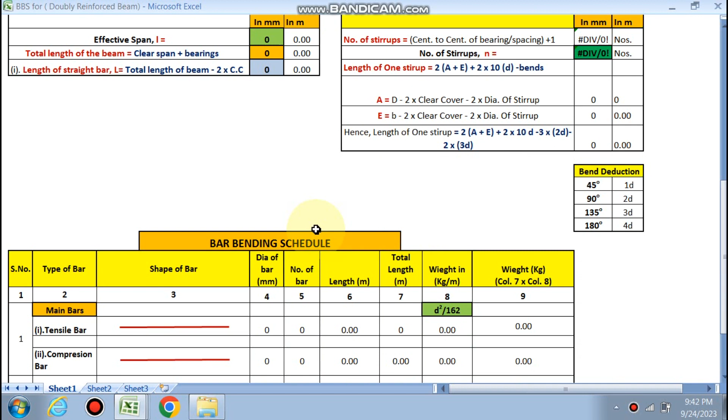In this Excel sheet you need to fill your data in these pink cells, and this will give you the length of the straight bar, stirrup calculation, number of the stirrups, length of the stirrups, then the tensile bar, compression bar, and the stirrup weight will be calculated, and finally the bending moment. Finally the bar bending schedule will be done.

So we have a clear span of 4.5 meter. This is the wall bearing on which this doubly reinforced beam is supported. Clear span is 4.5 meter in this case, and beam dimension is 300. 300 is the width, and the beam depth is 450. And the bearing on the walls, and this is the support. The wall thickness is 300 mm, but the beam is supported at a distance of 200 mm. So bearing on the walls is 200, right?

And the dia of the bottom reinforcement, that is tension, because in the double reinforcement tension will occur at the bottom and the main tension reinforcement will be at the bottom. So dia of the reinforcement in tension is given, that is 20, and number of bars 2 in our case, and the dia of compression bar is 16 mm, top bar 16 mm, and the number of bars is also 2. The dia of the stirrup is 8 mm.

This is two-legged stirrup, and the stirrup spacing is 200 mm, and the clear cover we are assuming for the beam is 20 mm on top and bottom and the side. So we have put our data, the input data of the beam. You can see that the L section is being drawn by this Excel sheet, and this is the cross section at the mid span. 300 by 450 is the beam size.

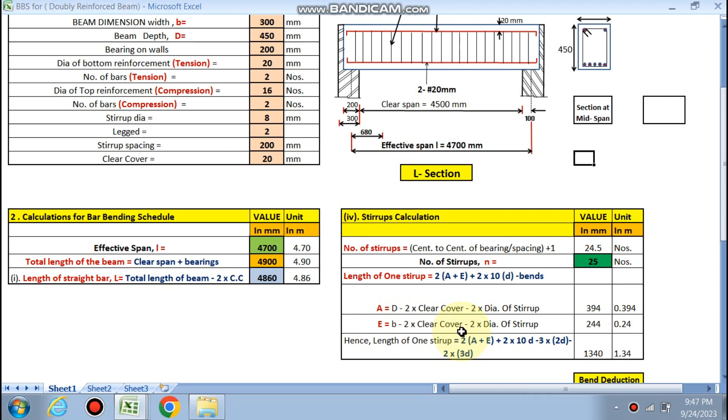A is overall depth 450 minus 2 clear cover minus 2 dia of the stirrup. So you can see 394 is the A value. E is 244. B is 300 mm minus clear cover from both sides minus the dia of the stirrup, that is 8 mm. So you can see the formula is there, and 244 is the E value. So length of one stirrup by this formula comes out to be 1.34 meter. Now the bar bending schedule is very easy. We have already done it in the earlier videos.

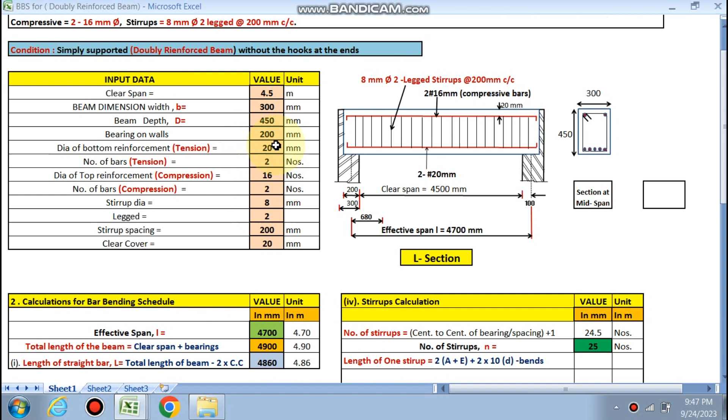Tensile bar 20 mm is the dia. We have put our dia 20 mm. Number of bars is 2, and the length is 4.86. You can see the length of the straight bar is 4.86. Now the total length is twice into 4.86. Weight per meter, kg per meter, if this is 20, d square by 162. Now you can see 2.47 kg per meter, and the total weight, because total length is 9.72, multiplied by 2.47 comes out to be 24 kg.

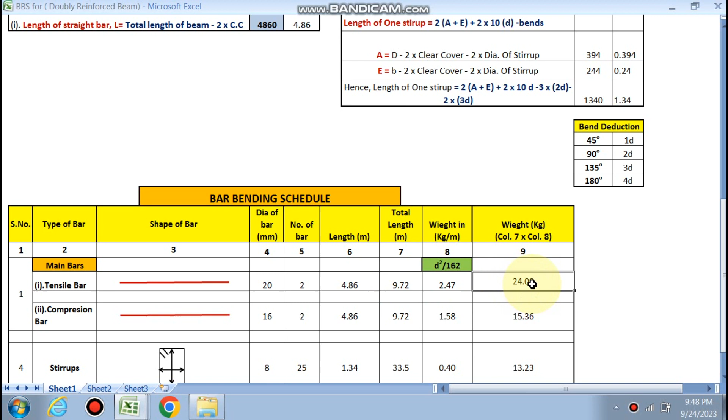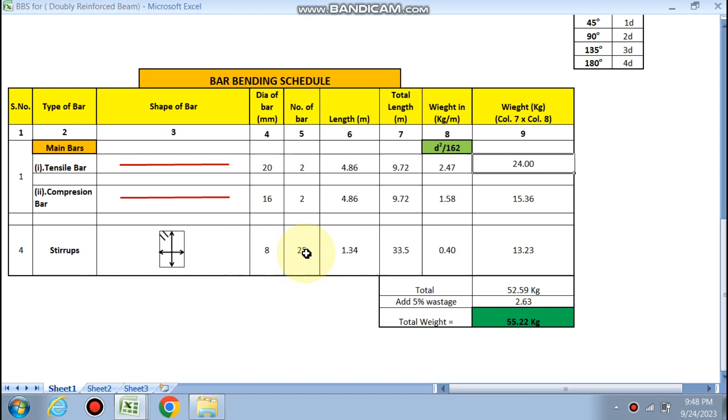Same for the compression bar, two number of bars, length is same, total length, and this is 16 mm dia, so the weight per meter is 1.58 kg per meter, so total weight is 15.36. And the stirrup, you can see 25 numbers of stirrups, and the length of one single stirrup is 1.34, so finally the weight comes 52.59, and add 5% wastage, so 55.22 kg.

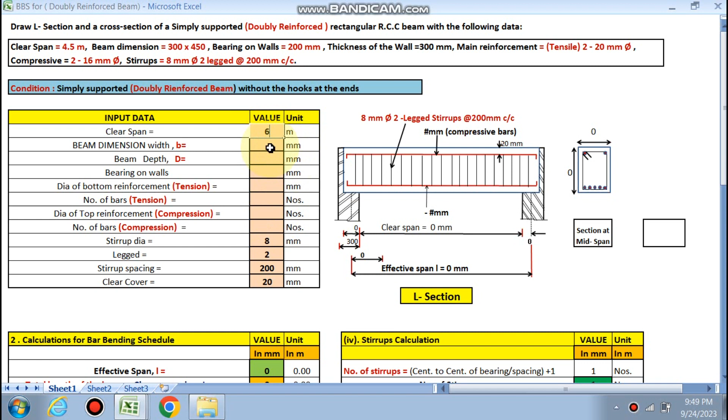Now if we are changing these dimensions, you can see if you are assuming this is 6 meter, and the beam dimension is 350 by 500, bearing on the walls is 250 mm, and the dia of the tension reinforcement is 25 mm, 3 numbers. Dia of the top reinforcement if you are assuming 20 mm, and the number of bars is 3 each.

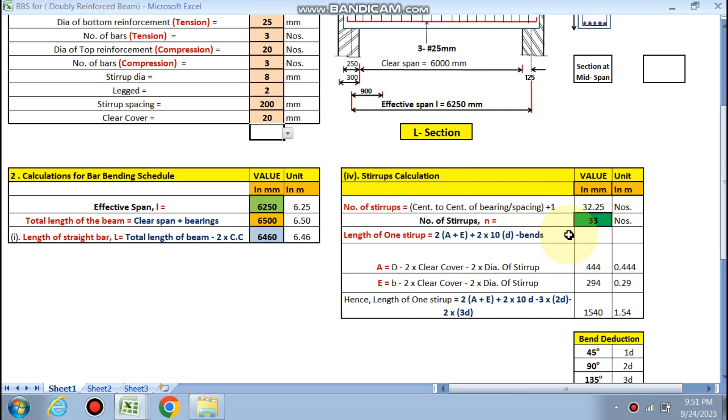Stirrup dia is same. Now you can see the length of straight bar has been changed, number of the stirrups calculation has been changed, and the length of one stirrup has been changed. And you can see all the weight has been calculated. Now 149.83 kg is the total weight of the reinforcement placed.